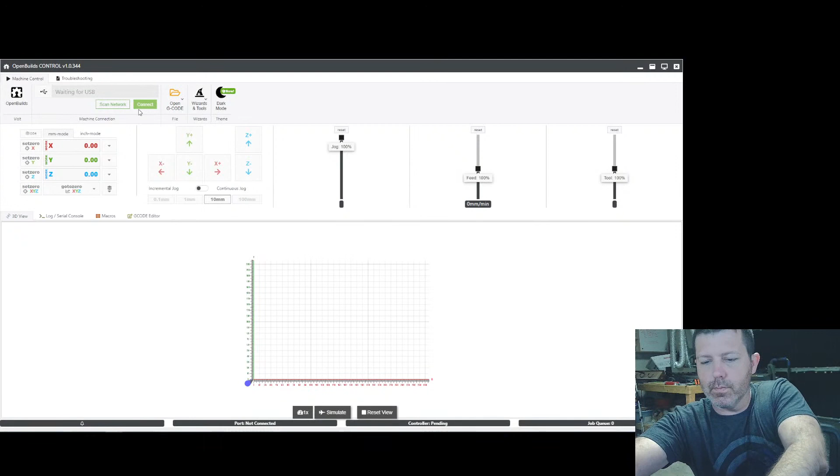All right, so over here in OpenBuilds, my CNC should be connected up here. Let me make sure that's plugged in and turned on. There we go. So once I connect to that, it should allow me to get to all the controls over here. Now we're going to go unlock the alarm on that one, and then all the buttons over here appear, right?

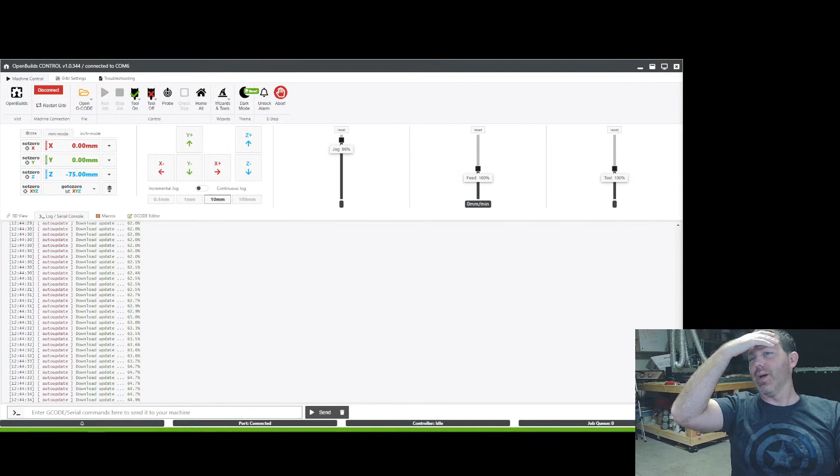Yeah, Craig, so I have an Easel subscription as well. I know I talk about it a lot, almost as if I represent the company sometimes, but no, I pay for my Easel Pro as well. I just download the G-code from it, then upload it and open it in OpenBuilds and use OpenBuilds as the sender. I don't use the sender portion of Easel. You're going to see here one of the features you can do that Easel just doesn't support. You can manually type in some of these commands in Easel and do it that way, but it's not the best solution.

Oh yeah, great timing too. As I open it now, it installs an update. Perfect.

So over here in OpenBuilds, I'll give you guys a quick little run through, very quick. When you open a G-code file in OpenBuilds, it'll preview it down here below. We need one that is not for a 3D print, because that's going to look really weird. Actually, if we go back to the desktop, there might be one for my - yeah, that same one I ran last week, right?

So this is the 3D carve of a moon shape with a taper on the top, right?

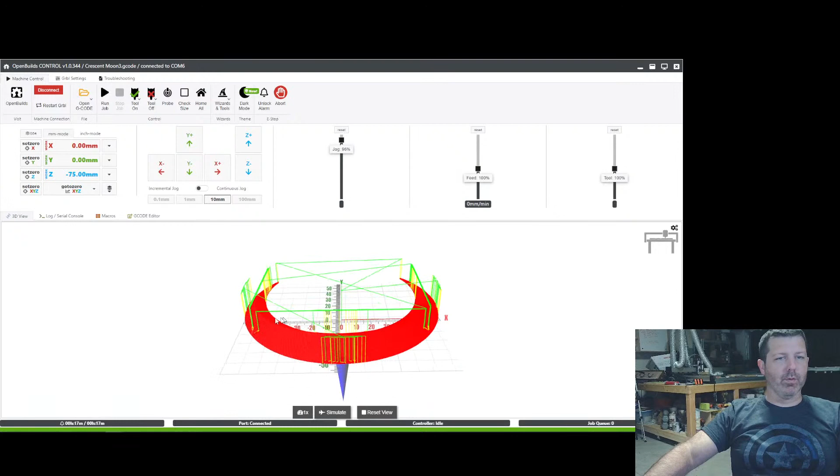Over here we have this 3D preview that you can move around and see all the toolpaths a bit more clearly than the one in Easel, which shows the toolpaths and the lines of all the lifts and plunges and all that stuff. But what you also have is I could set X, Y, and Z zeros anytime I want to, which is not an option in Easel.

You got to set it in their methods, right? If you have a probe, you can set Z zero using the probe in Easel, and then you would set X and Y in one swift step. But over here in OpenBuilds, I have the option to set Z0 manually just by clicking this button, and then I can set X and Y0 manually, independent of each other as well.

And then in the last video I discussed how to set up a corner probe. That way you can tuck it up to the corner of your workpiece and be able to probe X, Y, and Z0 that way, right? But a lot of people like to use a fixture on the CNC.

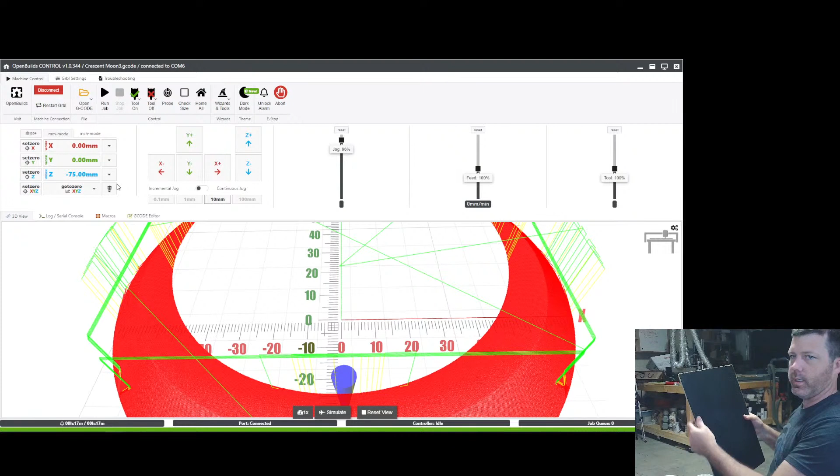In that case, you kind of use an L-shaped bracket on the front left corner of the machine. I don't have a second camera set up yet, but we'll use this as my example. Let's say this is the work area of the CNC, and this is your front left corner where you could justify a piece of material.

So one thing that I would do is place a piece of MDF, screw it down, clamp it in place, or even glue it in place, and then cut a smooth face on it. You can do that in the front as well to give yourself an L-shaped corner, and then when you go to carve your workpiece, one after the other, you tuck it into that corner.

That jig setup reduces the need to use the corner probe that we discussed. Once you identify that exact corner of where those two pieces meet up at, you can save it into OpenBuilds and UGS. It actually saves onto the CNC machine itself as a G28 function. You can actually have more than one.

Let's say you set one up in this corner, and then use some sort of locating pins or a different jig that you mount, with a way to locate it every time somewhere else. You can save that as a second jig location as well, and you'll see that in here too. I refer to G28 as the main one, and G30 as a secondary, but they both function identically to each other.

So the way that corner works: once you mill the face of that MDF, you know exactly where it's at. And once you mill the face, you could save that point where they meet up as that G28.

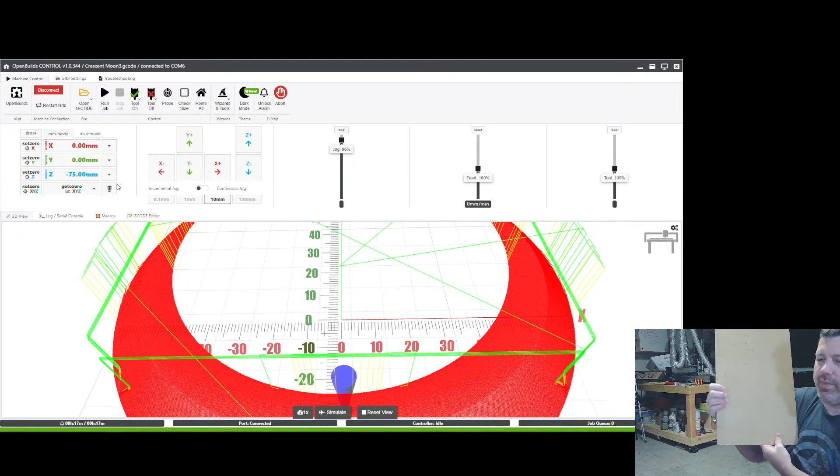Let's say we home this machine, which I can't actually do because it doesn't have motors hooked up to it. But we would then jog it over into position and find that exact corner we want this jig location to be in. So let's say I home it, and then I slowly jog it up into a position over there.

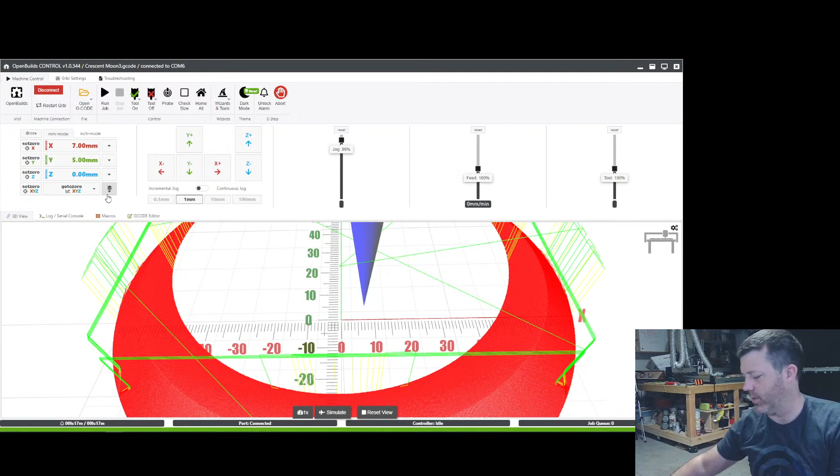Once it's in that position, the next carve I have set up is going to use that position and cut the faces of these two pieces in a little circle right here in the corner. That way we can always fit a right angle of the stock in there. I'll show you that in a photo in just a second, as I pull that up to give you an example of how that corner jig location would work.

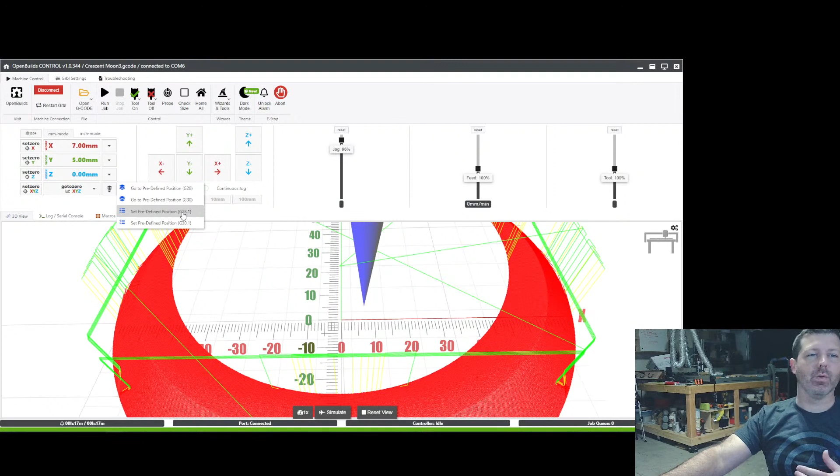Once we get it into position for that corner jig, we'll click this little expansion button, which gives us the option to set your predefined positions. If you're typing this in manually, like in Easel, you would have to jog it over into position and then go into the console window and send the command G28.1, which you can also do in here by sending manual codes. Sending that G28.1 effectively saves the current position as an offset from the home, as that new jig location.

So next time you want to use it, you would simply home the machine and then come over here and click go to that G28 position, and it's going to immediately jog directly over into that exact corner.

So let me show you an example of that, the CNC corner fence real quick. Some of these examples that I'm going to show you are 3D printed, while others you can CNC yourself, like using a piece of MDF. PwnCNC sells the files to 3D print these yourself, and I think they sell the 3D printed pieces as well.

But you can, if I can type CNC right, that might help too. You can 3D print your own, like these ones here show, or carve them out of MDF. And there's Etsy listings where you can carve them. Here's, I think, the Ben Myers one here.

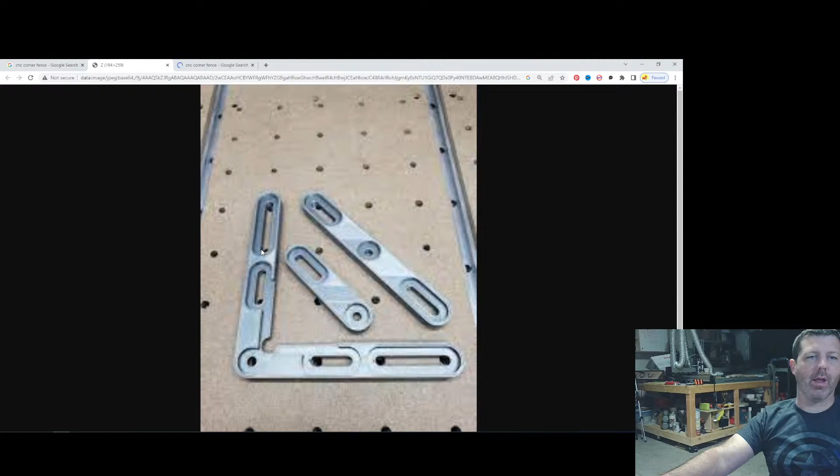And it's very easy to set up in any software to lay this sort of thing out yourself. So this corner jig I was talking about, this one here is 3D printed. You want to make sure your 3D printer is properly calibrated before you print this out. This particular one matches the bolt holes of this particular wasteboard, so you'd make sure it's parallel to your X or Y, hopefully both, and then mount it in there. You've got this corner that you're going to butt your workpiece up to when you want to use it.

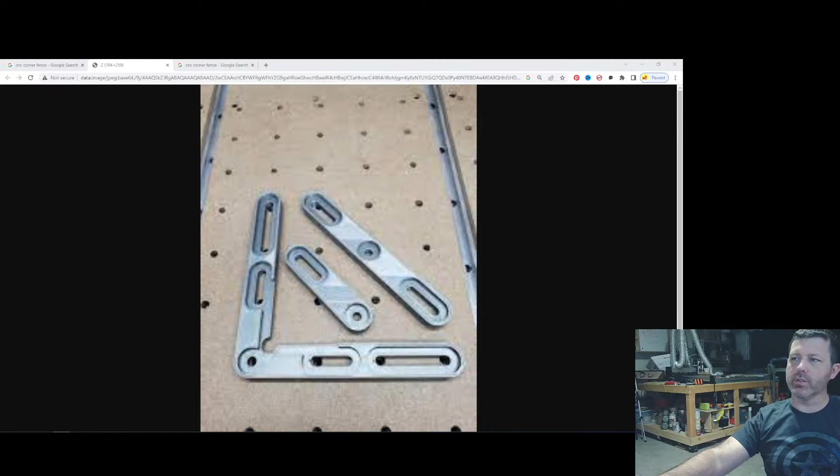Yeah, so Howard, have you set up your G28 yet on there? I see that you said that you used the L-shaped corner one in OpenBuilds. Let's see if this pop-up is going to work here. Oh, nope.

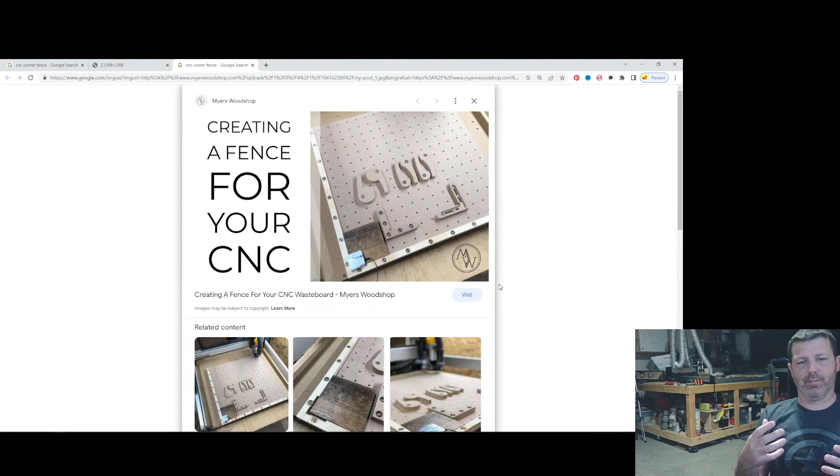Yeah, Kevin, I mean, you can do that. You can kind of position your corner jig down in there so that when you home, it does match up. However, the caveat to that is one, you'd never be able to go outside of that, and two, it's possible you can have issues where if your design is at all outside of that, then it could cause crashes.

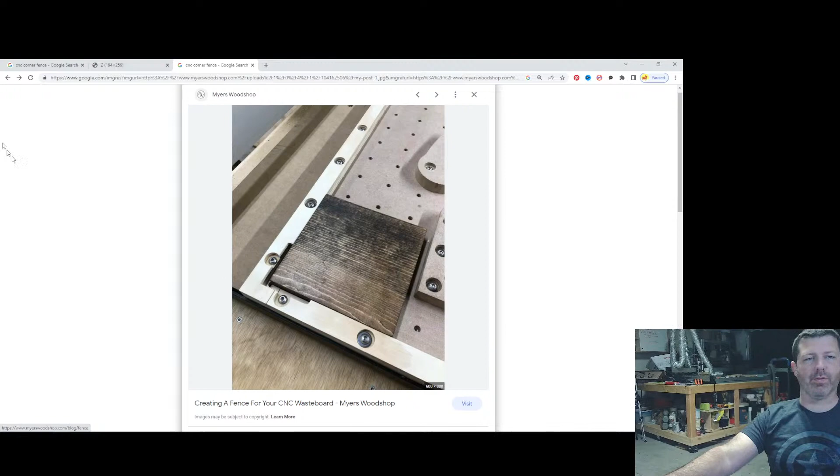Let me head back over here. So here is an example from the Ben Myers woodshop, where he also carved out a portion of his fence to be able to fit his XYZ corner jig. And that's a good idea to identify that position at first if you need to. But then once you have that jig location saved as a G28, you no longer need that. The thing is, a lot of people aren't aware that this feature exists, so I could see why that would be included in these.

So here's the main jig location, this will be this G28, and then you can save a different one. This is a good one because all the holes will help justify it in the exact same spot every time going forward, so you can save this as a second jig location.

Or in my case, I have a couple fixtures that I mount that actually have like a quick clamp on them that allow me to put down a piece of stock, clamp it in place, and then with just the ratchet action of the clamp, it releases. I could pop it out and put a new one in. So I was carving like a slotted hole for almost like a biscuit in these pieces, 200 at a time. Rather than having the biscuit joiner in my hand the whole time and slotting these, I was doing them with the CNC itself.

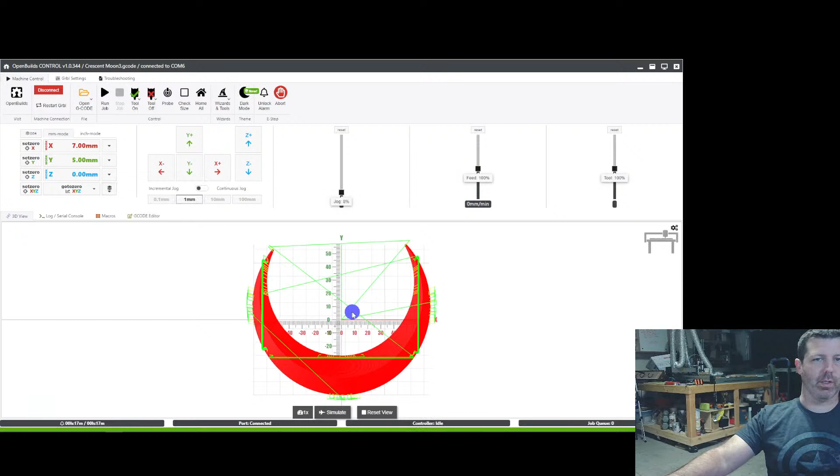Yeah, Craig, that's kind of what I was getting at here, and so it jumped. I don't know if you saw that, but let me jog it over again real quick. Let me reduce this jog speed. When I click go to predefined, it quickly runs over there into that position, right? So it repositioned it to that 7 and 5 position, and that's an offset from the home.

So once you get it there, then I would click set zeros again, and then I would run my carve. When you do this, you can see how low my z-axis is. It does matter where you z it at. So when I do this normally, I would home first, that way the z is at the top point, so I don't drag it across the workpiece when I go to use it.

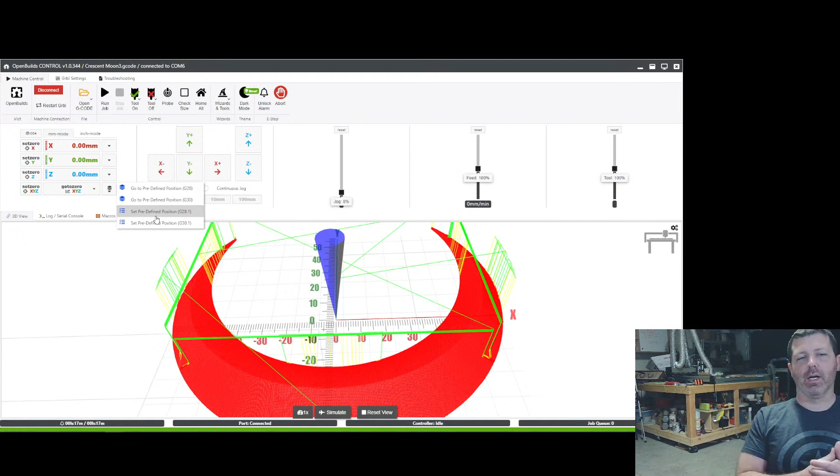So can you set up more than one G28? OpenBuilds is set up so that G28 and G30 are right here together, and those are the two defaults. There are other ways to use, I think G54 and a few other ones that work extremely similarly to this. And if you go over to James Dean Design's channel, he has a video where he sets up a corner jig, but he used the G54 function, I believe, in his video.

And that's a little bit more user involved, but he's using UGS, where you don't have these quick buttons. You've got to either manually type it or set up macros. And what macros are, they're basically customized user-created buttons. So we can jump into that real quick here. We'll cancel that one. So over here, there's a tab in OpenBuilds called macros.

Let me open up UGS real quick in a different window, and I'll show you in UGS as well, since those are the two most common senders. I guess gSender is catching on pretty well too, due to its additional functionality. Now the caveat with additional functionality is more settings for users to manipulate and mess up. I like OpenBuilds because it has a lot of functionality without a lot that the user can really mess up. And UGS is very similar in that regard, along the same lines as far as functionality and user setup.

Let's see if I can get that open here real quick while I go through the rest of OpenBuilds, if it wants to load for me, UGS.

This is one of the things I don't love about UGS. So I've gone over here and navigated to the folder in my downloads folder. In order to open UGS, you've got to navigate all the way through to this bin file, and then run this executable every time. Now you could save this as a shortcut to your desktop, or put it in a different folder somewhere, but unlike OpenBuilds, where you actually get a program that I can just go in the Start menu and type in OpenBuilds and get it right there, you can't really do that in UGS, unfortunately.

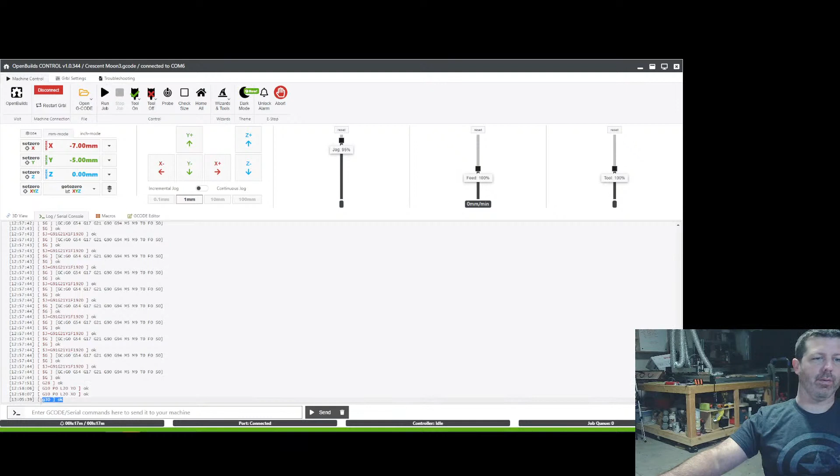So these are basically, the way I have them set up right now, just sending one single line of G code. You can get quite intricate in there and have it send multiple lines. Getting to know what the G codes do will help you in setting up those lines, but you could have it move to position, automatically set the X and Y zeros, and do that in one click of a button by using the macro, because right now these other buttons up here will only move it into position.

Right, so using the macros - kind of the way that James talks about setting up the G54 - you can have a lot of positions set as an offset from home.

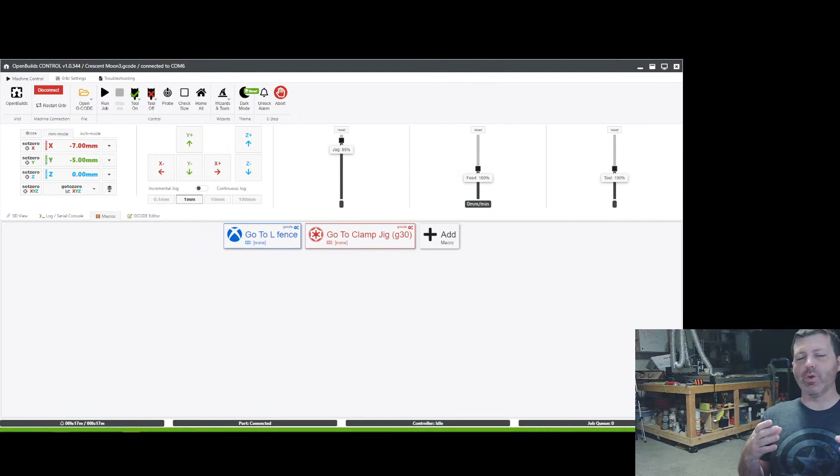So you could use that corner clamp. Let's say you're doing circles, and you butt them up against the two pieces of the clamp. So you bring in a circle that's a larger diameter, and you butt it up to the two pieces of your corner, and you want to use the center point of that. If you can save these jig locations so it goes to G30 and up to a certain position, that can be a macro button.

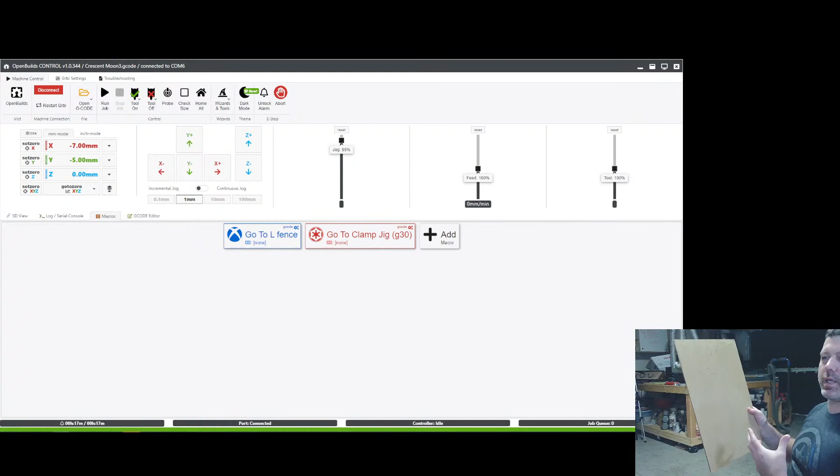So it moves there, and then you just click set X and Y to 0. If you're using the exact same size circles, or even a few different diameters, that would be a good way to auto-center them as long as they are consistent and identical to each other. That'd be a good way to use a few different sizes of round stock like that, and be able to quickly and easily find the perfect center of it.

Oh, we're already at 107? I guess I started late.

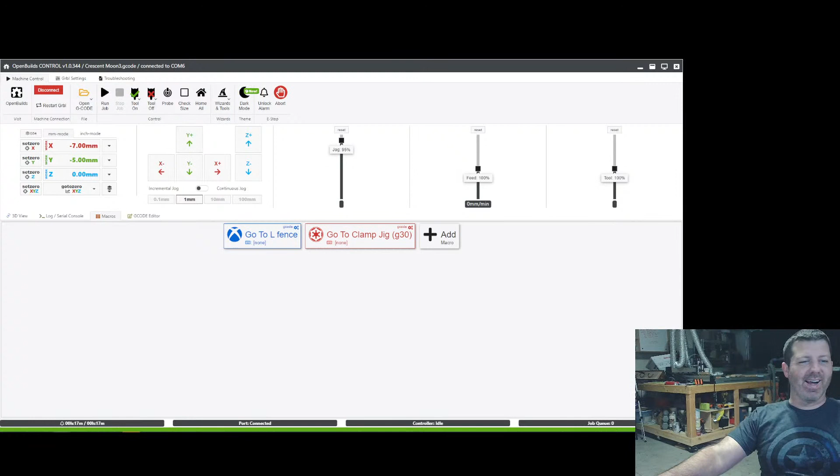That's okay. So we've got UGS over here, and I'll show you real quick. For setting up a macro, we've got this little button down here on the bottom left as the default. We have to go up here under Windows - is it under Windows? I use UGS a ton.

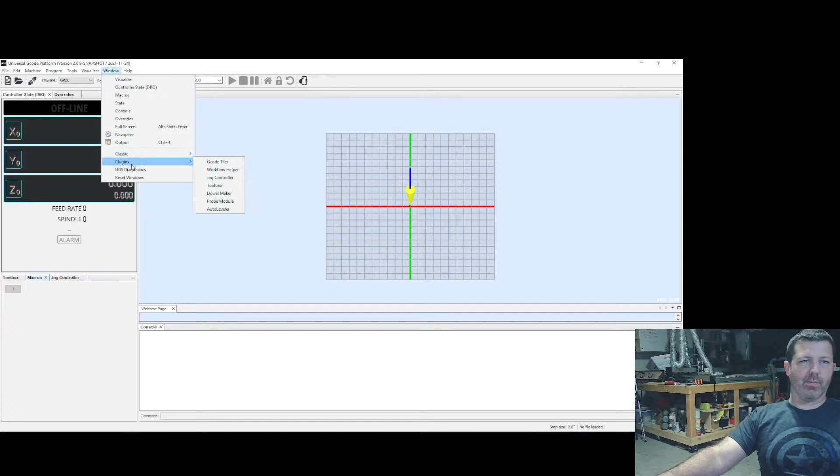You know, again, that James Dean Designs video - I believe he shows setting up the macro for this as well. So I would check that out.

So over here under Machine, there we go - we have the macros button, and you can edit macros right here. If I click the right button, not Setup Wizard, sorry - we'll try that again - edit macros.

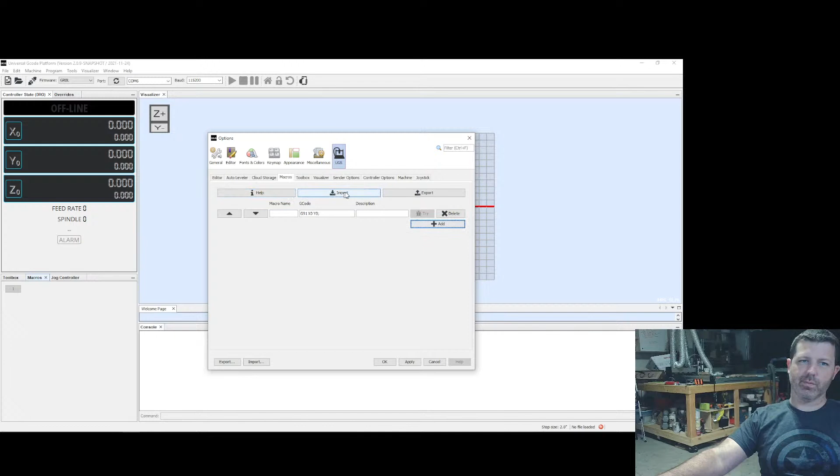We can define more, add them in here, and set up additional ones. Let's see if it lets me add. There we go. So we had to assign a name to that first one.

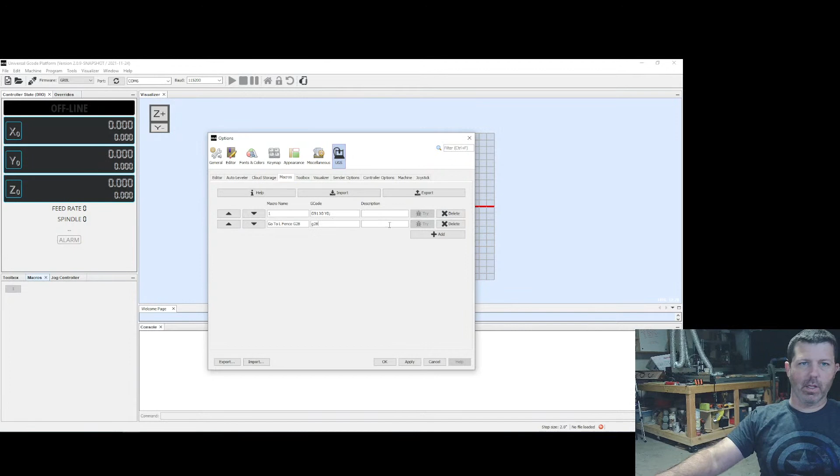All right, so we can assign this one the same thing, G28 - or I think we want to call it, what, L-fence. There we go - L-fence, G28, and the command here is G28. And you can again set a description so it pops up here as well. Let's do that real quick.

L-fence home position, and we'll go ahead and apply that. And we should get the button right here showing up.

There we go. So since my CNC is connected over here, I've got to disconnect it from OpenBuilds. And then these buttons become clickable right here. When I click that, I haven't homed yet, so it doesn't really like streaming to it. So let's unlock the machine and then click that button, and then we sent the G28 command.

So again, for saving the jig location, you'd have to send the G28.1. You could set this up as a button, but I suggest not setting up the 0.1 version as a button because it's just too easy to click that button and override the previous location.

So what happens here - when I go in and save that jig location, it's saving it onto a chip on the CNC itself. And it doesn't matter if you leave that CNC unplugged and not use it for a year and a half, that jig location is still saved on the CNC. It doesn't matter if you change to a new computer, it's still saved on the CNC.

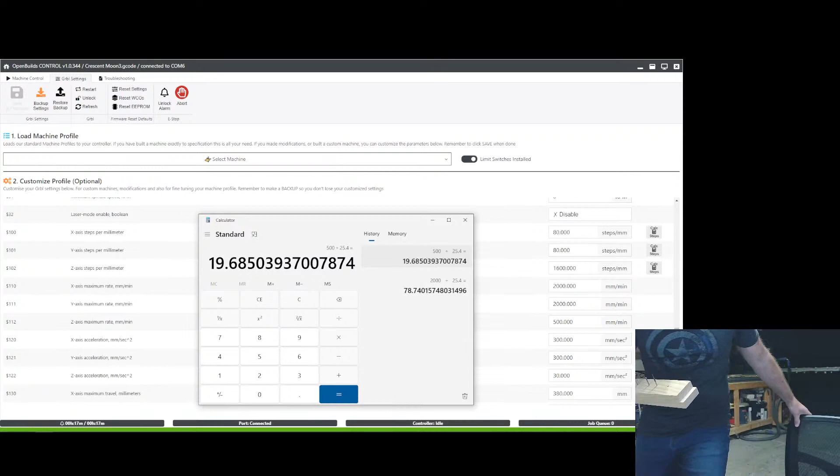So the only time that's really going to change is if you change out your brackets and you need to reassign it - you would just send that same command. Like let's say you had brackets that were super small and you want to change to a thicker one for more stability, and you put new corner fins on there and need to assign it to that new position. You just send that G28.1 again and it would reassign to that new position.

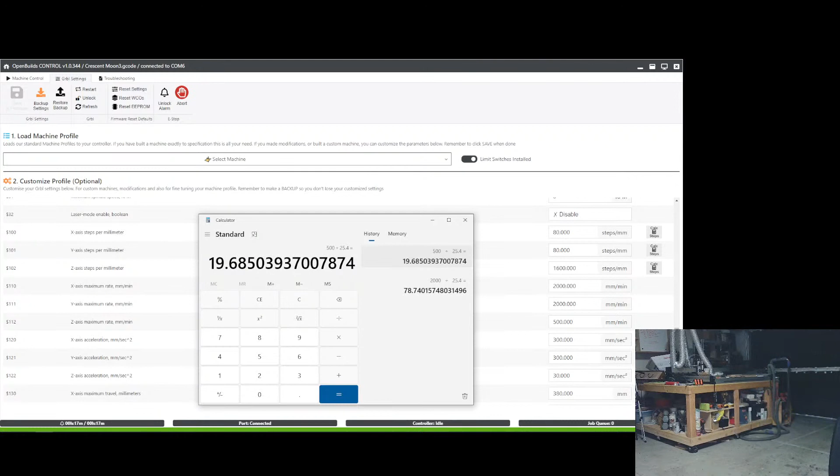So if you do that and you override the previous one, well, you'd have to re-find it again in order to set it up for the previous one, in order to reconfigure it back.

So back over to OpenBuilds.

And here real quick, I want to go over a few things. So you used to be able to type in, just kind of as some housekeeping tips here that I recently learned.

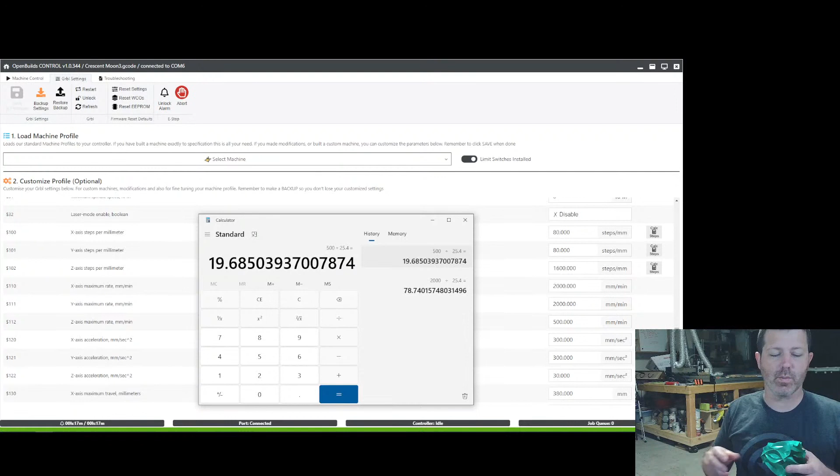They updated OpenBuilds a couple of months ago, and there used to be a box over here where you would tell it what feed rate you wanted to jog at, and they got rid of that, and now it's this slider only. So basically before you had a slider and a number, and now you have a slider only. Now, I don't love how that doesn't tell you what the numerical value is. You have to know what your machine's max feed rate is in order to adjust that slider.

When you close UGS, there we go. So you can adjust the slider. Now it's going to go at 50% of the maximum jog speed. So if we come over here to this, let me connect real fast, the EEPROM settings tab, which should pop up here in a second. There we go. We can scroll through the EEPROM settings over here in OpenBuilds and see what those are.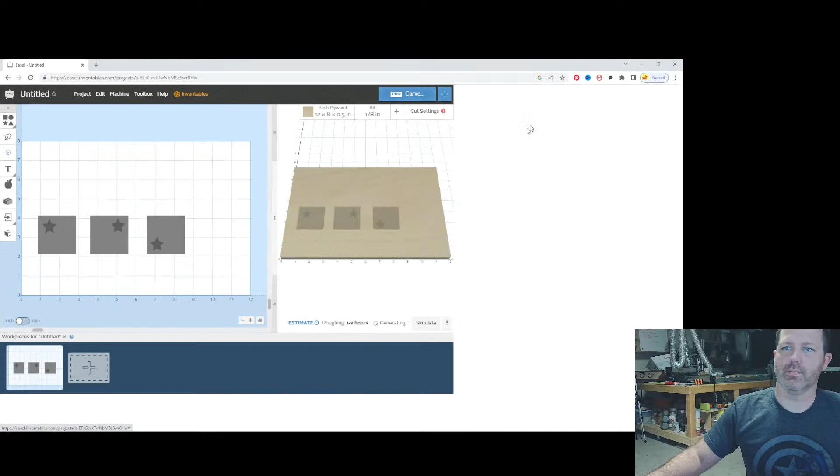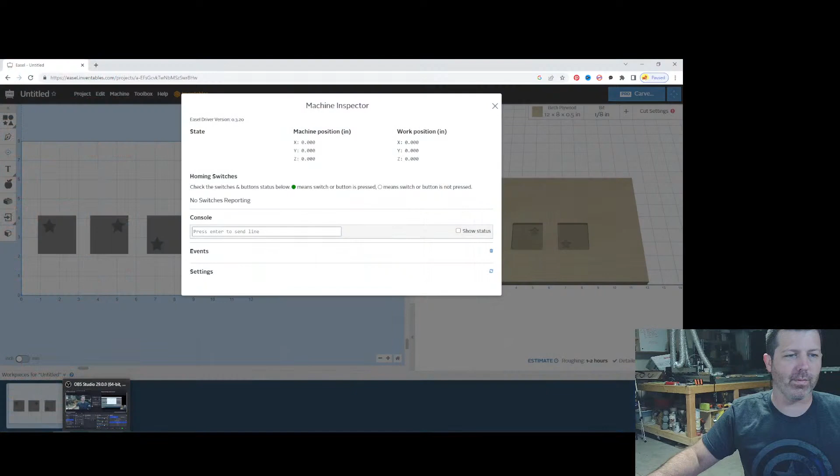So the max feed rate is separate for X, Y, and Z. The max feed rate for this machine it's plugged into is 2000 in the X and Y, which those are almost always the same. And then Z goes a little bit slower at 500 because you don't typically need to jog down that fast. That's how you crash and damage parts, right? Break bits. So 110, 111, and 112 are your settings for the maximum feed rates.

Feed and plunge rates. So knowing that 2000 is the maximum for X and Y and 500 for the Z, when I go and use the slider, I would need to know that because 100% is 2000, 50% is 1000, 25% is 500 for the feed rate jog in X and Y. And then if I go to jog in the Z, it's going to use 25% of 500, so 125 millimeters per minute would be the feed rate there.

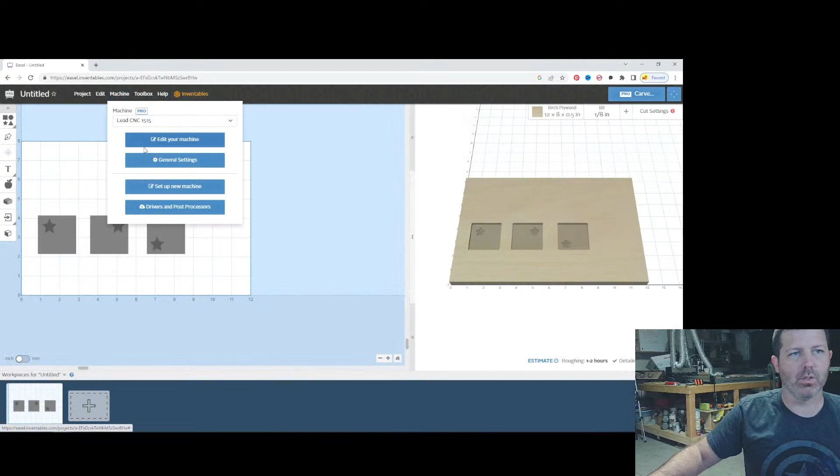And if you are using inches, well, GRBL wants to operate in metric and millimeters, so that's why all these values are that way. And when you change the settings, you are going to have to do it in metric. So even if you run the CNC using imperial and inches, all of these settings are in metric, so you'd have to do some conversions there.

So this right here is where the second topic of the video that I want to cover was: if you really want your carves to go faster, you need to change this max plunge rate, and know what it is, because you really want to only use that faster max plunge rate for the finishing pass of a 3D carve.

So if you increase this speed and you accidentally set a plunge rate higher for a regular carve where it's plunging straight down with like an end mill, you're probably going to lose steps in the Z-axis and potentially damage the workpiece or the bit. So keep that in mind if you do edit this setting.

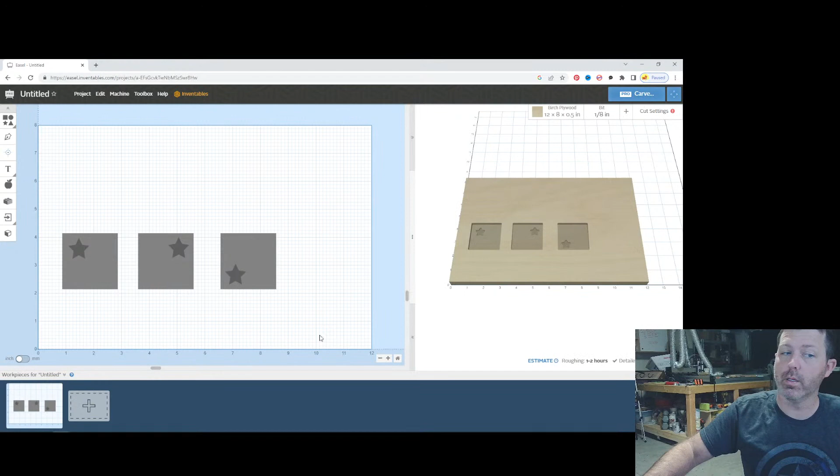Now, the reason why I said it's going to be a huge increase for specifically the X-Carve is the X-Carve uses -- so this machine it's plugged into now runs NEMA 17 motors, and these are really slow. My bigger CNC back there runs NEMA 23s, and it's actually also a belt-driven machine, so the X and Y can run really fast. And then, of course, it has a lead screw for the Z.

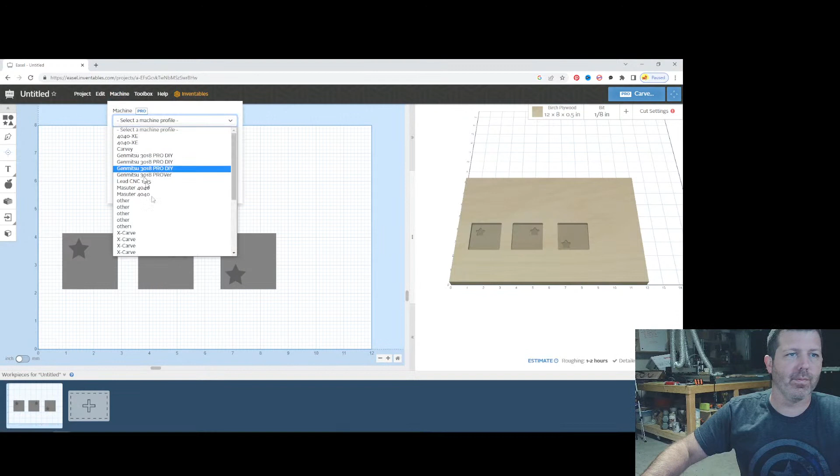So even the Z on that one can go, I have the Z set to, I think, 2000 on that one, and the X and Y set to about 18,000 millimeters per minute as my maximum feed rate for the X and Y, and then 2,000 for the max plunge rate. So that's pretty fast, and that allows me to run -- what's that in imperial for those that are -- my plunge is set to 78 inches per minute as the maximum plunge rate on that machine.

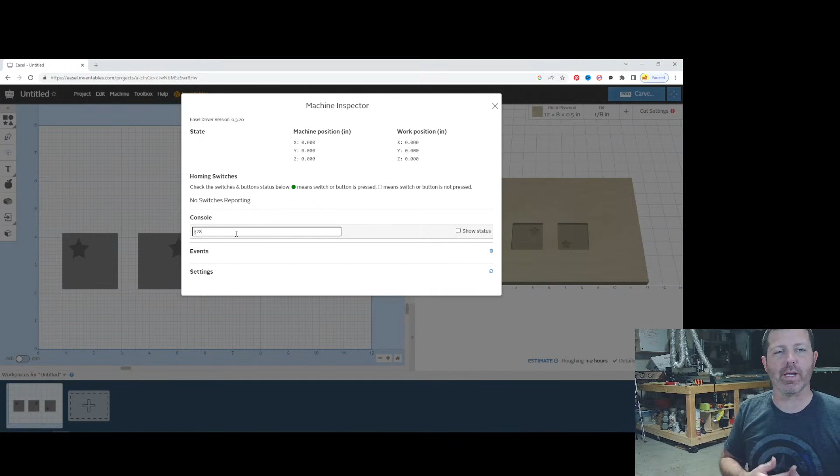Now, the X-Carve plunge rate default is 19.68, I think it's 500.

So, 19.68 is the default plunge rate on my little NEMA 17 Fox Alien Masuter, and that thing runs a tiny little spindle. It has the same max plunge rate as an X-Carve running NEMA 23 steppers and a router that's 10 times as strong. So there's really no need for it to run that slow, other than Inventables not wanting people to damage the machine when they first get it.

So I would easily increase your X-Carve to 1,000, maybe 1,200 for this, and not blink an eye. That's an easy setting you can change up to there, and if it's running fine, go even higher.

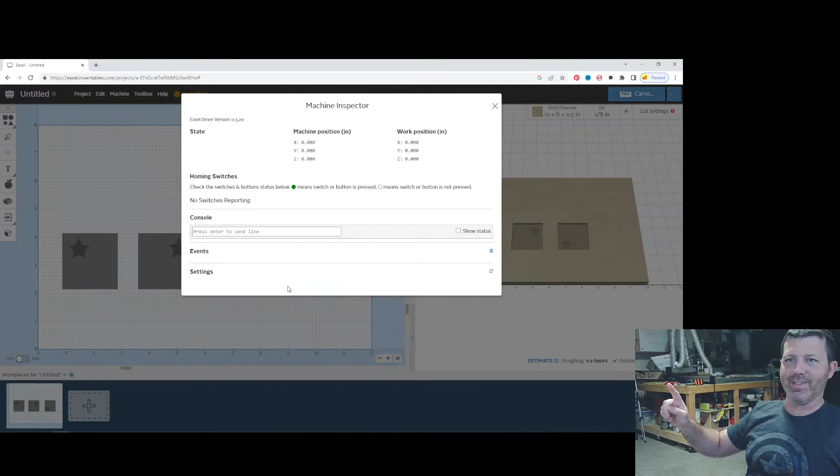There's another great James Dean design video where he talks about how to tune these settings to find a good acceleration and max plunge rate. The next part of settings in here is the acceleration. You don't really need to change those, but his video does also discuss tuning those higher to get a bit more speed out of the machine.

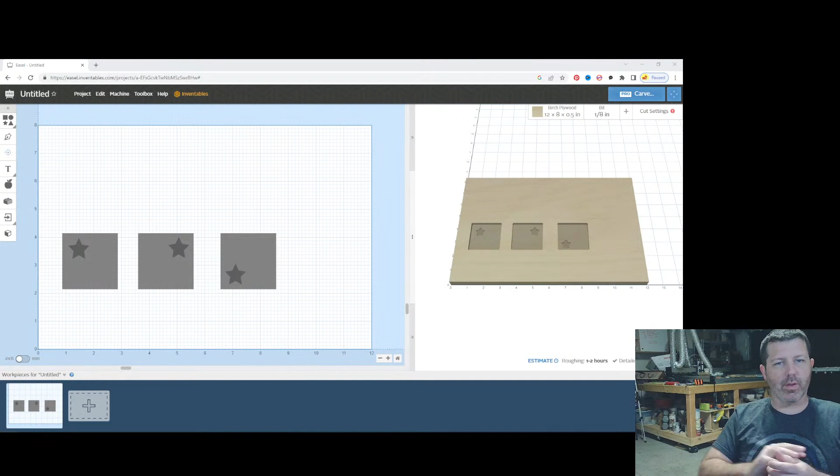As far as what I'm talking about here, changing the max rates is the key to getting those 3D carves to run a lot faster. So currently, if you have an X-Carve and you haven't changed these settings, if your plunge rate is set to anything higher than 19.68, you're just using some wishful thinking there, and it's not actually going to carve that fast. You'll have fictitious values for your carve time telling you it's going to carve significantly faster than it really will, because these are settings on the machine itself.

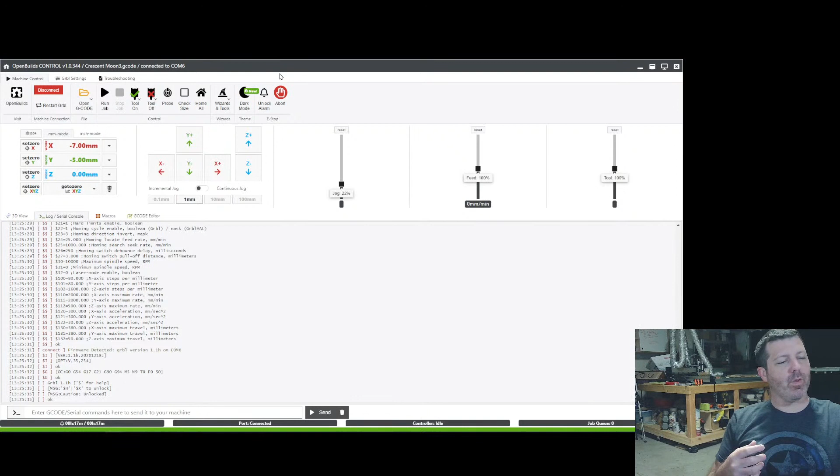So if I send a carve to this machine and tell it to carve faster than this, the machine itself reduces it down and says, nope, that's my max. So it doesn't matter if I tell it to carve at 200 inches per minute - the max feed rate is 78.74, and the max plunge rate will be 19.68.

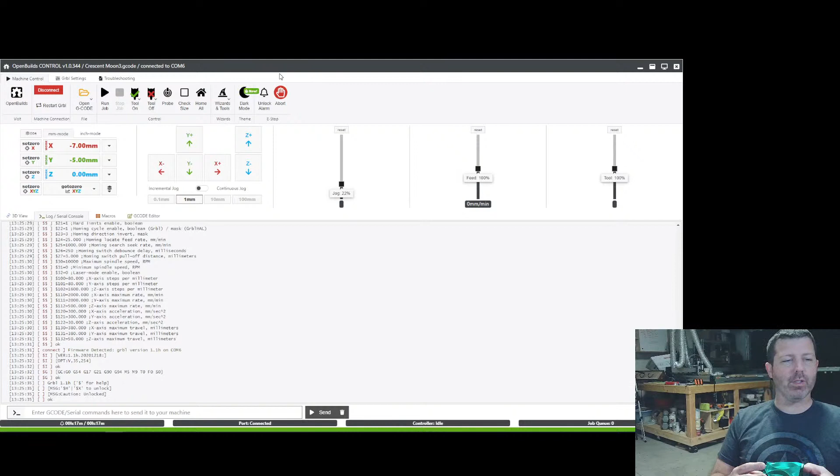Now I'll show you real quick with a bit why this matters. That's a little bit easier to demonstrate. Let me grab some bits here to show you that real quick. So as you do a 3D carve, let's see if I have an example over here somewhere.

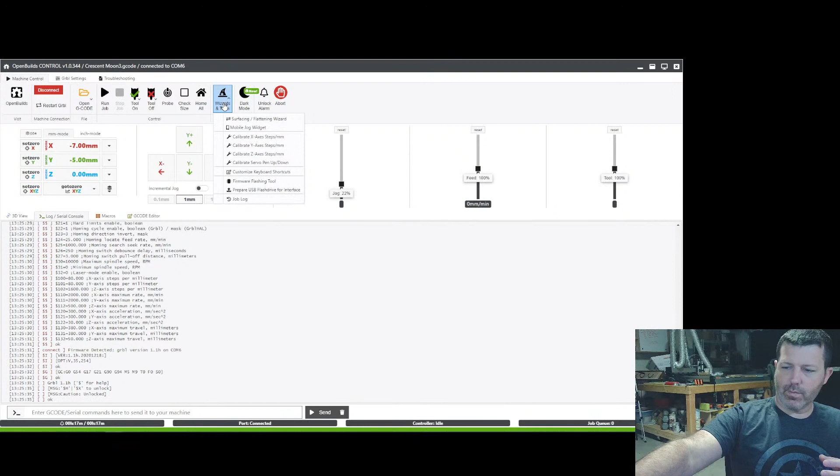This is a great example here, a 3D print. So if we take this 3D model and we're just carving the relief at the top, as it's going up and down over each of these step overs, every time it's moving in the Z axis at all, it only goes 19.68. So even though it's moving left and right, anytime it is going up and down, it effectively slows down that feed rate to match whatever the plunge rate setting is.

So when you set up a carve, if you really want it to go fast, it doesn't matter that your feed rate is set to 78 - it's only going to go as fast as the Z-axis when the Z-axis is moving, if that makes sense. So that's really the key: to set your plunge rate higher in Easel, but also, if you're using Easel or Carbide Create, Vectric, or Fusion 360, to increase what your max setting is as well.

And I'll show you how to do that real quick over here in Easel. It's along the same lines as this, and that'll be a good spot for me to show you how to potentially use the G28 commands over in Easel.

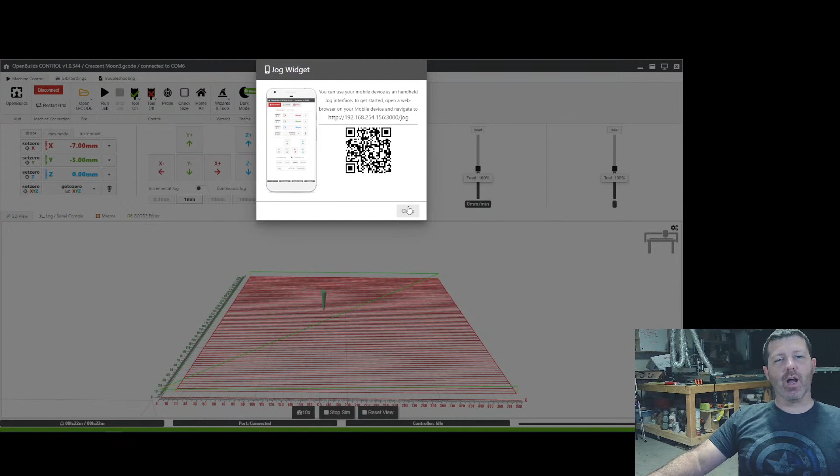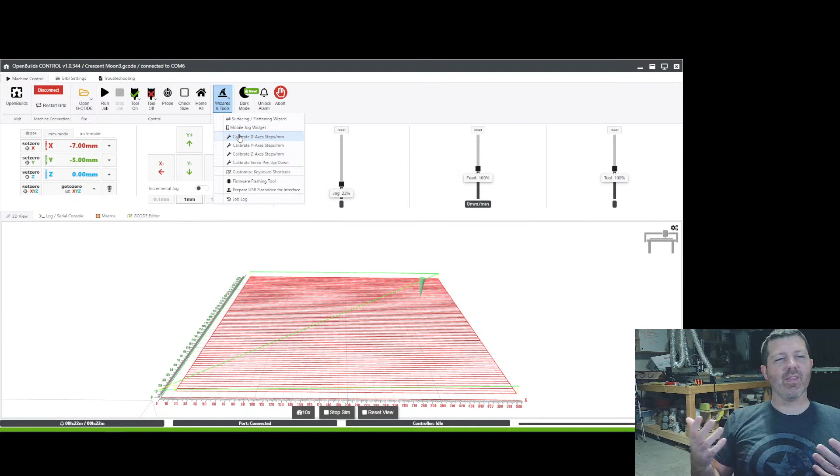So if you're not aware, anytime you do a machine setup, if you're not actually running one of these X-Carves or Carves, do not select these - it will change some of those GRBL settings I just pointed out on your machine. For the purpose of this, just going through real quick, we'll set this machine up. Now we've got a new machine set up, and it should allow me to connect and get that green carve button. Hopefully. Maybe not.

Maybe not today. We'll see. But regardless, we go over here to...

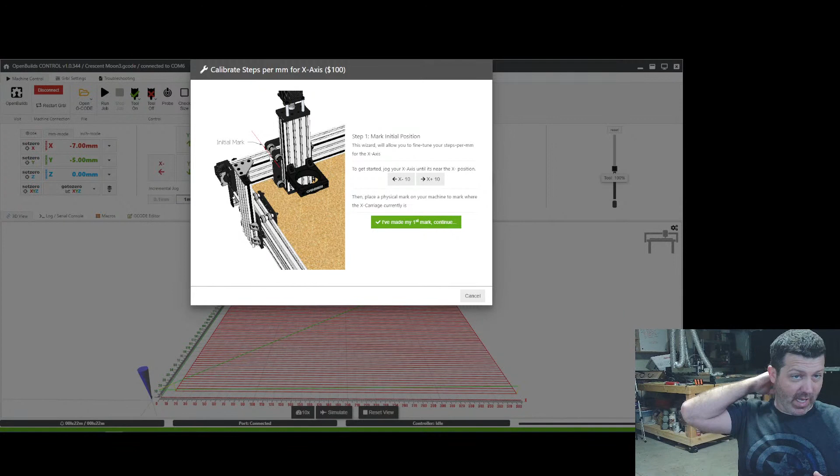In Easel, under those general settings and machine inspector, you have an area where you could type in a command, like that G28. I would type it in here, and that is how you'll be able to use that G28 command in Easel.

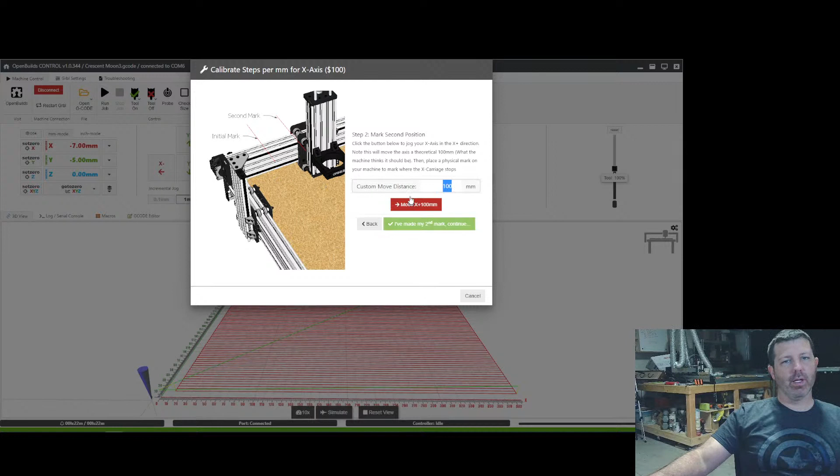It's not quite the simplest way to do it, because you can't set up macros and save them as buttons within Carbide. You have to manually type it every time. So right here is where you would use that G28 jig location that we talked about earlier within Carbide.

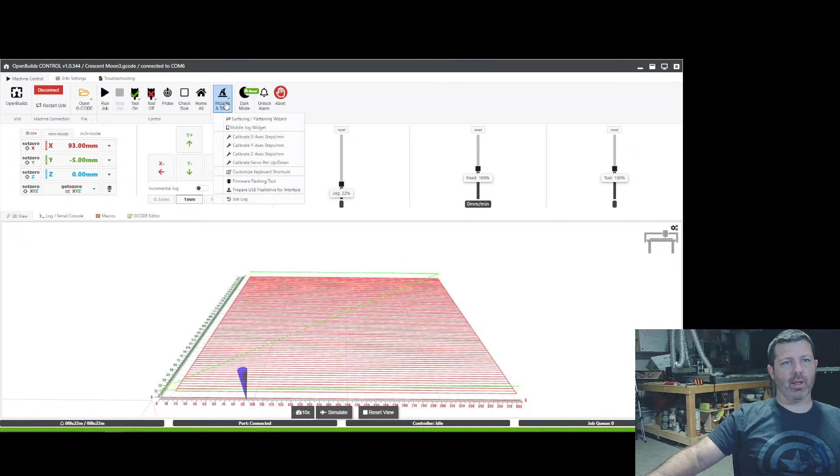When this is connecting to a CNC, which I'm not quite sure why it won't connect to this one right now, but it might have to do with having 17 different USB devices plugged into one computer. You can go over here to settings, and it will show you what those GRBL settings are, the same ones that I just showed over in OpenBuilds.

Those same settings will populate here, and you would send a line like if I wanted to change that $112, which is the speed of the z-axis, I would type in $112 equals. The default for X-Carve is 500, so if I want to change that to 1,000 or 1250, I would simply type in $112 equals 1250 and hit enter, and it would send that line to the CNC, updating those settings.

Now this bottom bar here won't auto update. You have to click this little refresh button, and then it will update those settings on your CNC.

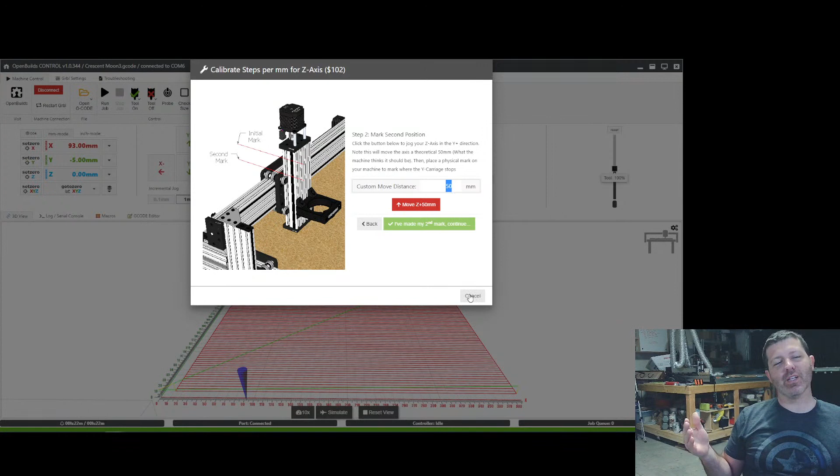I guess I need a 20-foot long USB cord so I can connect to that other CNC over there. Usually when I run it, I'll set up my computer right here on this extra area of the table, and the USB cord for that CNC is really short. It just goes to right there. So I don't have that one connected right now.

So that's how you would effectively set up a jig position as well as editing your settings.

Was there anything that you guys wanted to talk about today? Any questions or anything like that? You can go over a few projects if you want to. Or I can talk through some more of OpenBuilds over here.

So one issue that I've seen recently with people trying to convert to OpenBuilds is that OpenBuilds is set up to run the default baud rate for GRBL, which is 115200. Now, almost every CNC is also set up to run on that same baud rate.

However, there were some issues with some of the earlier models of the X-Carve Pro, and in order to combat their communication troubles, they went ahead and reduced that baud rate just a bit. By reducing that baud rate, it no longer works with some of the senders that only run 115200, so you'd have to go in and manually change the baud rate for that particular machine. Every other machine that I've seen connects up just fine.

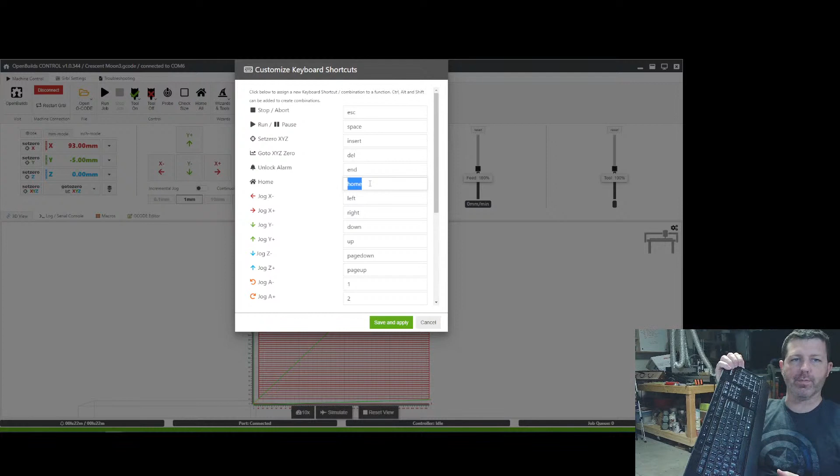So since we are back in OpenBuilds here, and I've got a few more minutes to go over some stuff, let's talk about the wizards here.

Once you connect to your machine, you have access to a few more buttons than what you see without it connected. We have a surfacing flattening wizard, which allows you to quickly create a G-code file for surfacing your workpiece.

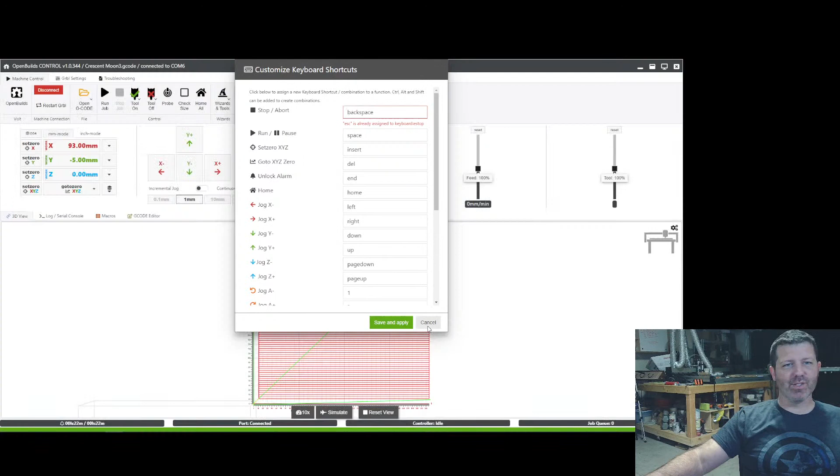So you just enter in your bit diameter, like my surfacing bit is a 22mm wide surfacing bit using those carbide inserts. You can set the stepover percentage to what you want it to be. Really, anything below 40% is fine.

If you want to do it quickly, you can set it up to about 40%, and that isn't too bad. Then you set your feed rate to what you want it at, and the dimensions of what you're surfacing, whether it's the actual wasteboard of the machine or a workpiece, you can set that up in here as well. And then the depth at which you want it to remove, once you Z0 it.

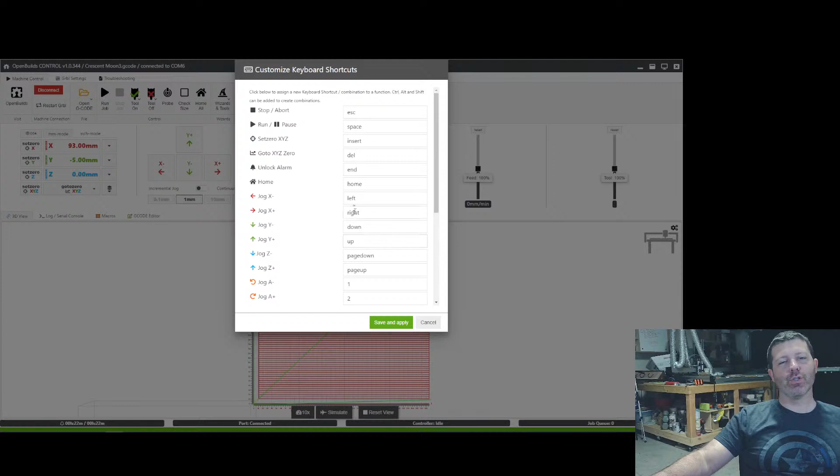The depth you want it to surface to. So I typically set this to about 0.3 to 0.4 when I run a surfacing pass on a workpiece.

If you have a spindle that has RPM control, this is how you would enter that as well. And if you wanted to have automatic vacuum controls, you can set that up in here too. Once you click proceed, it creates the G-code file. And if we jump over here to 3D view, you can see the new toolpath it's going to follow.

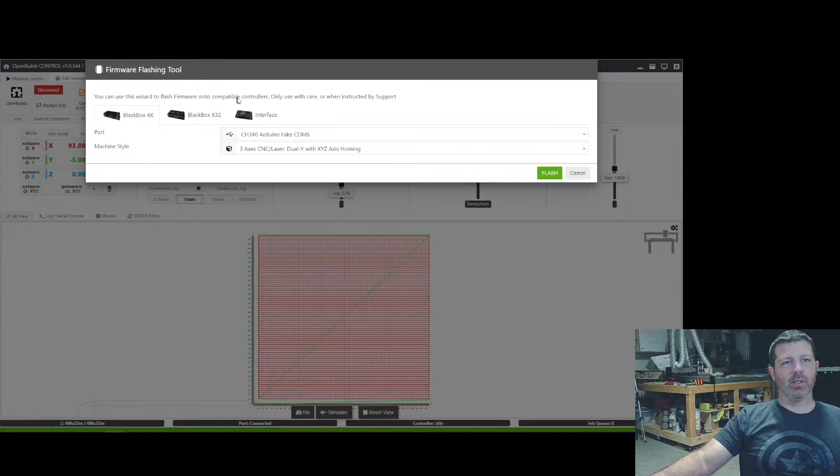And here's the simulation of it going back and forth, kind of what we call mowing the lawn, where it does parallel passes going back and forth from top to bottom. Then it does that singular perimeter pass around the outside. So this was a really quick and easy way to set up a surfacing toolpath.

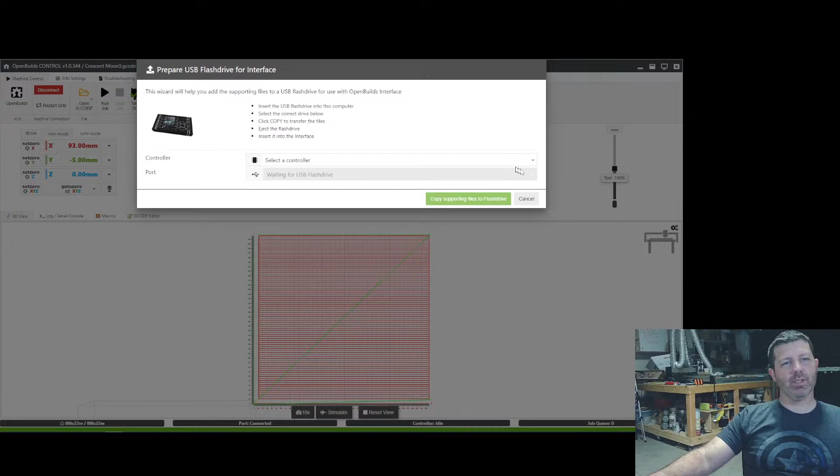Now UGS also has this feature as well. They added it a while back, last July timeframe I believe. These two softwares don't really copy each other, but they do kind of piggyback off each other from time to time. Users of one software will see the features in the other, then contact them with a feature request asking can you add this. And they're like, oh that's a good idea, we should add that. That's typically where they end up kind of copying off each other without doing it on purpose.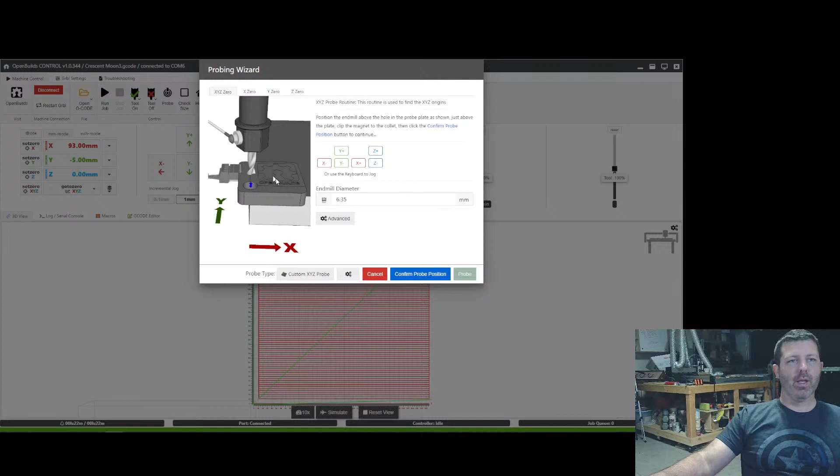A Bluetooth mouse works well if you can see the monitor from that far away. I'd have to turn my screen around, and the cable on my USB is so short that it would be tough to do. Again, that's just kind of a caveat of my setup. But a USB mouse and USB keyboard, or a Bluetooth keyboard as well, is a good feature to have.

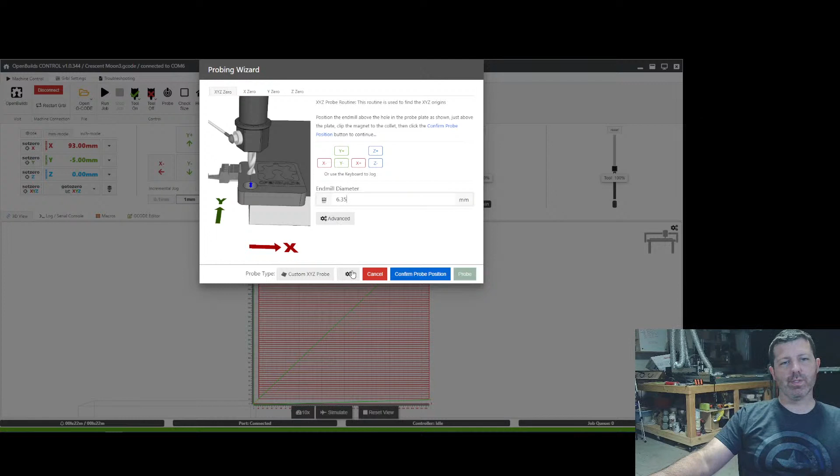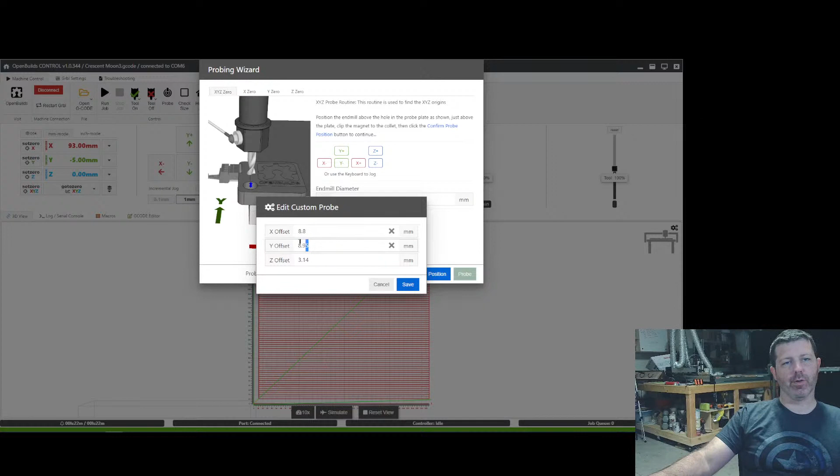So I would mark this point, and then you tell it to jog the different directions. As you go through this setup, it asks you to mark it again, and then you just measure the distance and tell it how far you want it to move, and move it, so it moves over that amount. Then you measure the distance of your two lines and enter that distance that you measured, and it will automatically recalibrate your machine for you and save that data to your CNC machine.

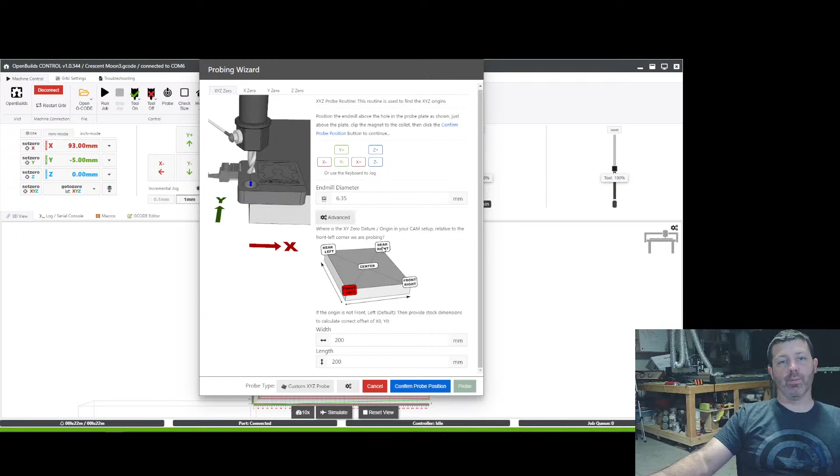And then you can do that for X, Y, and Z. Z is a little bit more tricky because you're measuring the raising up and down of it. Again, if you do this process, like I mentioned, it shows in the second step how far to move it. The more you move it, without crashing obviously, the more accurate the calibration results are going to make your machine. So on that machine back there, it can move 48 inches from side to side, but I've got to be able to measure the distance, so I might only move it about 40 to 45 inches. But if I was to do that same calibration over only 4.5 inches, and my measurement with the calipers was a tiny bit off, that same amount of measurement being off has a lesser effect over a longer distance like that.

So it effectively makes the calibration more accurate. Again, it has to do with the tools you're using to measure as well. So I might prefer to use calipers as opposed to a long tape measure, which might not be quite as accurate, right? So just something to think about as you calibrate your machine.

And then over here, you can set up your custom keyboard shortcuts. So we've got the default ones that are set up in here, and some more down below where you can change that.

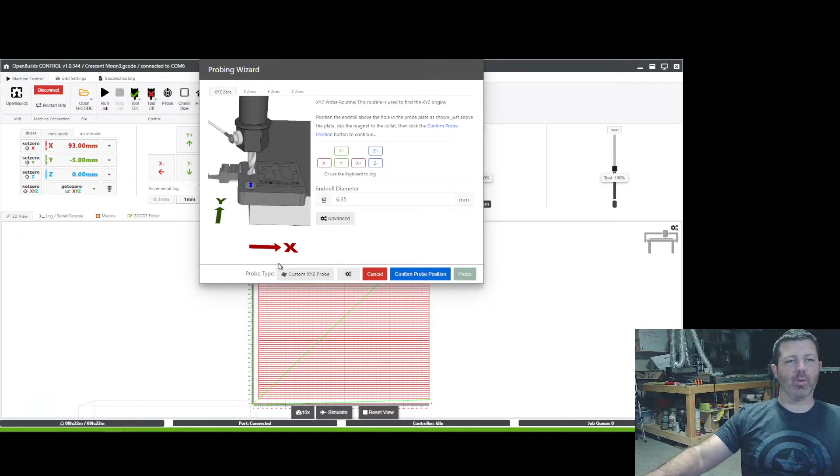Step size. That's interesting that these settings are here that no longer apply. The decrease and increase step size used to affect that box that was in here, where actually I think it actually does select these selectable ones, right? So if I click apply and I use the plus and minus here, it automatically goes through and cycles through these different buttons, right? So that's kind of a neat feature there, is that you've got this keyboard shortcuts pop up where you can set these up.

Now, UGS has a lot more options for setting up these keyboard shortcuts. So I'm a little jealous about that feature over in UGS, their shortcuts are there's a lot more of them to do just to apply, right, than there are over here in OpenBuilds. But again, like I said, I think OpenBuilds has enough user controllable functions without being too overly complex, right?

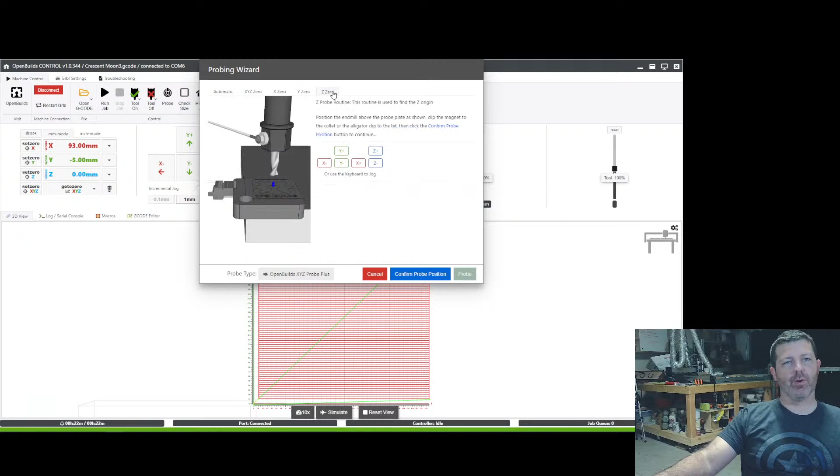So you've got the home button on the keyboard as well, which can I show you mine? I can show you mine. So on the keyboard here, I've got a home button on my full keyboard. I can just press home and it's going to home the machine.

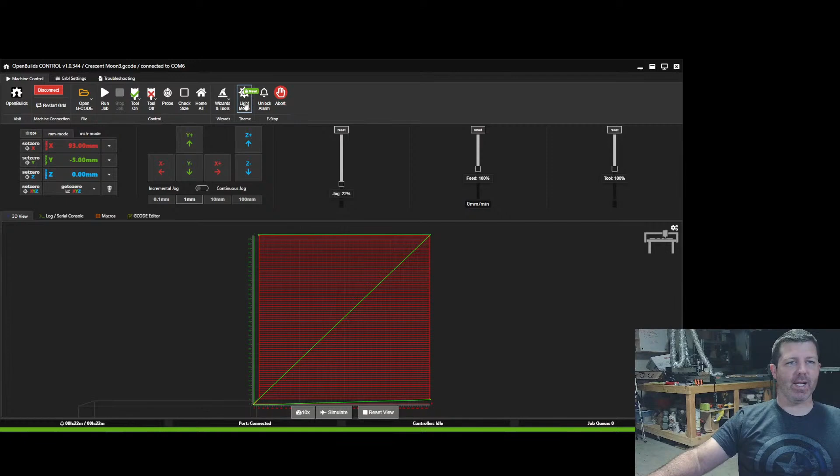And for running the machine, it's a space bar as well as pausing, right? So running and pausing, if you double tap the space bar on accident, you're going to run and then pause, as opposed to run and then stop, because stop uses the escape key. So just stuff to think about as you're running OpenBuilds, and you don't accidentally press the escape key in the middle of a carve.

Or you can actually change it to an unused key, right? And I haven't saved it yet. It doesn't allow you to change it back while it's still in there. So anyway, we can go through here and assign those to new keys if you like, or complex keys, right?

That is how you set that up.

In the similar area where you set the keyboard shortcuts over in UGS, you also have another option in there to set up a game controller. Unfortunately, OpenBuilds is not set up to accept the game controller necessarily, but you could use the Windows settings and assign the buttons on your game controller to these keyboard controls and achieve the exact same functionality out of a game controller, like an Xbox controller that runs off of Bluetooth as well, right? So that's pretty neat that you can do that. I do, like I said, I do like how UGS has a little more customization to the game controller than OpenBuilds does, but hopefully they'll eventually catch up on that regard, right?

And then this firmware flashing tool, I don't suggest going there and using it, but it allows you to flash to these different style machines, right? And again, it tells you right here, only use this when you're instructed by OpenBuilds support. So I don't suggest even bothering to open that up. It's not the same thing as flashing the Grbl settings or even the Arduino bootloader version. That's a whole different process.

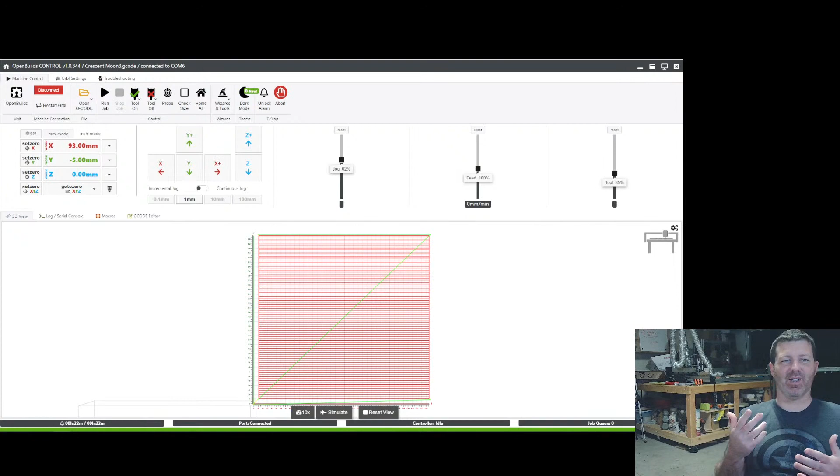And I've had people ask, can you convert an X-Carve to use the black box from OpenBuilds? You certainly can. It's extremely easy. It's just a matter of removing your controller and plugging in the new black box in the power supply to wire it up to your stepper motors, just like it is on the back of the X controller. And then you would have the same functionality of being able to do offline controlling.

As well as having this little touch thing, the OpenBuilds touch device, it does tell you the readout, the same readout that it shows over here, right on the front of the machine.

Yeah, it's pretty user-friendly to use that device.

Yeah Craig, so I went over the probe settings in the last live stream. I thought you were there. But here, I'll pull that up real quick and just kind of discuss it.

You would just confirm position and then probe. Then in the future it saves this value, so the next time you go to use it, you just open it, confirm position, and probe. That's how you would use the standard Z touch plate.